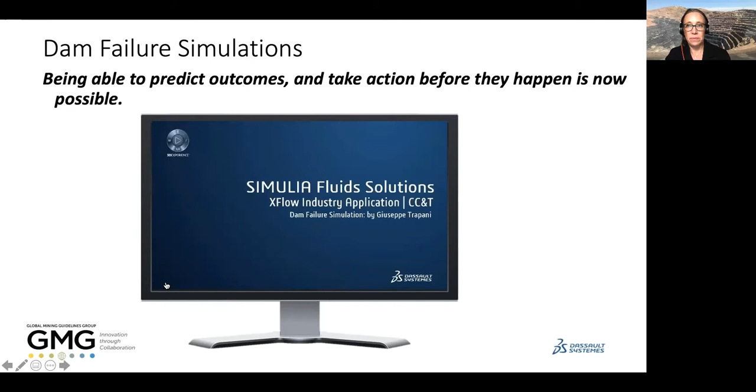So this is just the terrain that the dam is going to be built on. We have a dam wall. Now we can simulate the failure itself. Here we've just removed the dam wall. And then what is the flow pattern of the tailings that is behind that dam wall?

And you can change the viscosity of the tailings, you can change its composition, but essentially you then can have a look at what impact the tailings being released has. This is a very simple model, but we could have put buildings in the way, we could put fields in the way, we could put wild habitats in the way.

This particular model shows the speed and the strength of the material as it moves down, blue being the lowest, red, etc., being the highest. And so we can then specifically model the impacts, which then allows us not only to reposition the dam, to reduce the impacts, reposition some of the things that are in the way, create diversion channels, etc.

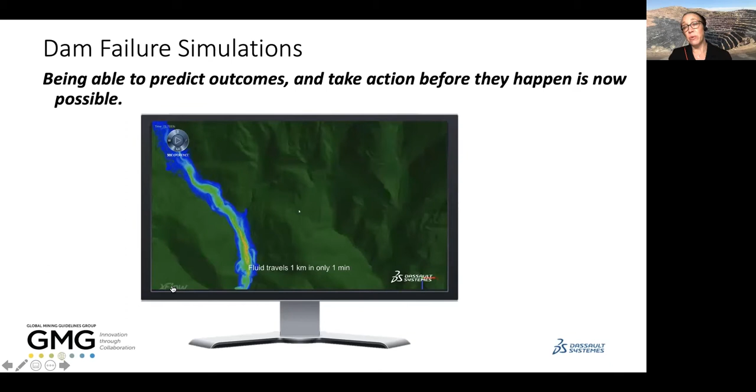And so why this is, I think, fundamentally important is it allows us to preemptively change any potential outcomes should the worst happen, and really think about, as I said, the sustainability of our operations. We can do in the virtual world before we do it in the real world, therefore reducing the risk, creating greater certainty, and so forth.

Mine closure simulations. So how do we start planning for mine closure today, even though mine closure might be 10 or 20 years away? How do we do it from the beginning of the mine so that we think from the very first piece of sod, how are we going to eventually close this operation? What is it going to look like? We can discuss those with governments, with communities.

And the great thing I think about these simulations, these movies, 4-dimensional, 3D plus time, is everybody can understand them. You don't have to be a technical expert to understand what I just showed you in terms of the tailings dam failures. You don't have to be a technical expert to understand what I'm going to show you in terms of the mine simulations. And so we can then use that for really good discussions with governments, with communities, with board members, etc.

But I think, again, part of driving operations that are fundamentally more sustainable is to use these sorts of simulations.

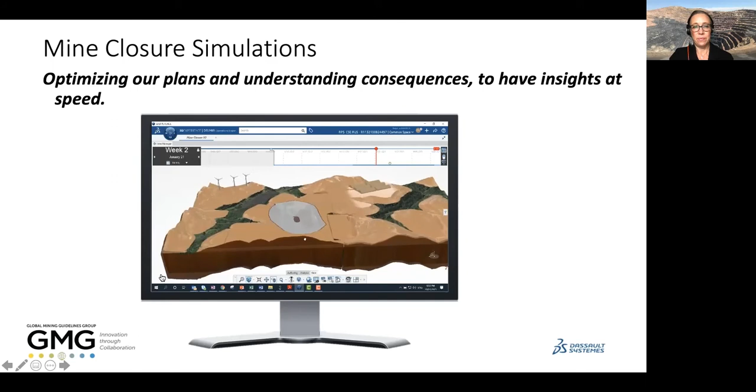So not only are those simulations helping us to think proactively, think ahead of time, but it allows us to try different things, try what if. In that particular example, you saw one of the things that was being simulated was wind turbines. But, again, we could simulate any other form of asset.

So the way we think about energy, I think, is another key to driving sustainable operations, and it's radically changing. Before we used to think about energy in terms of grid power, of large power stations often driven, in some cases, in the more remote cases, by diesel, natural gas, diesel driving a number of our mobile equipment.

But now we're thinking radically differently around solar, and a number of mining companies I know have put significant solar capability in, have put significant wind capability in. There's some more interesting technology appearing in terms of green hydrogen, which I do think is better for fixed plant than the mobile plant. But maybe I'll be corrected in time as technology changes.

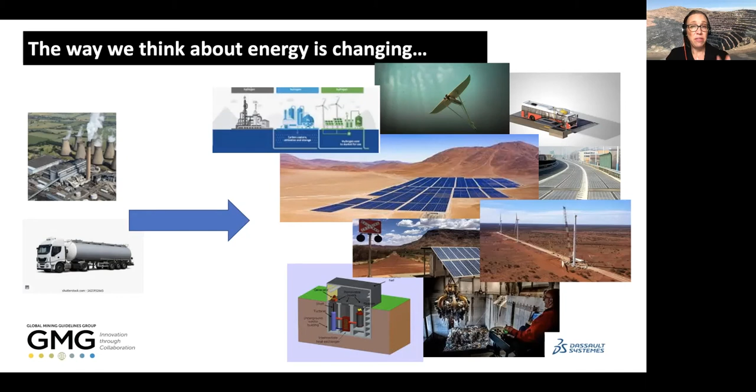We're working with some organisations that are harnessing wave power, which is this one here that you can see up in the top corner. There's a lot of research going on into small nuclear reactors, as well as biofuels, and not only biofuels, but also using waste to generate power. So, we're getting radical changes in energy thinking, and again, we're seeing that translate into mining organisations.

But what's helping really then us think about how does the electric mine change our ore bodies, because the economics change. How does it change our mine designs, which it of course does. If you electrify and automate, and you've got an open cut mine, for example, you can most probably take your ramps down from 2.5 times the truck width to 2.1, and possibly even lower than that.

The turning circles potentially change in your underground operation as you replace diesel equipment with battery electric equipment. And then I think more importantly, you rethink and potentially change with conveyance technologies. And I think that's where we then get a much more significant change. But again, all of these can be looked at under simulation.

You can look at your underground, in this case, mining operations. You can go, well, what does change if I put in different styles of equipment? If I start electrifying my mine, what changes in terms of my need for ventilation, what changes in terms of my need for power reticulation, how do I set up my battery technologies, how do I set up my charging, if that's what I need, where would I put my conveyors and my conveyance technologies, where would I run my fleets.

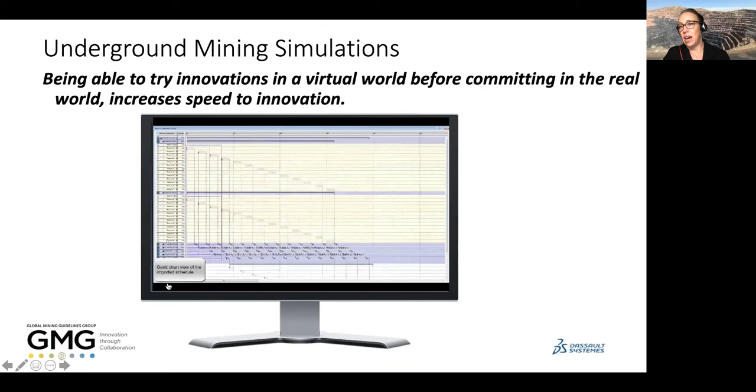All of that can be simulated. So here's an example of a very simple simulation to look at different equipment styles. So you can see initially setting up the mine infrastructure, the mine design. You'll see them putting in different types of equipment, watching how that equipment then operates. How does it change particular turning circles, turning capacities, loading rates. This is just running pieces of equipment through that.

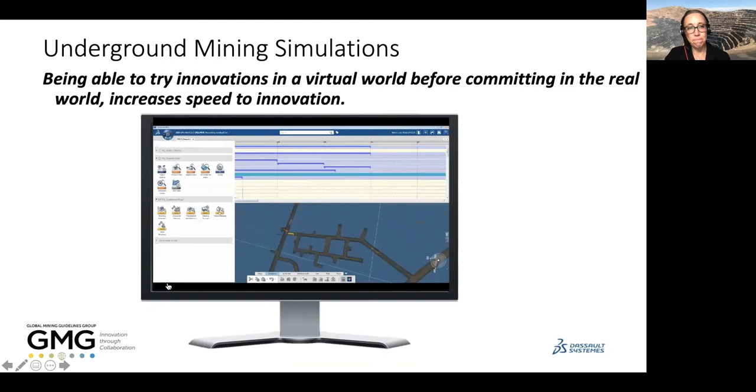So it allows us to really model in the virtual world what we want to try out in the real world. And again, de-risking it, because we can see some of the results of those simulations very, very rapidly. We can try all sorts of different things.

So the more that we can model, design and simulate the real world in the virtual world, the more that we can enable people to experiment and experience those outcomes, the faster we will innovate. And it's really because we will de-risk. We'll de-risk both the experience, we'll de-risk some of the optionality. We can try different things faster. It's much easier to change it in a model than it is in real life.

So often what I get asked is, but how real are these simulations? So we build the simulations up from base science and using science from base layers. And I think that is important, that we think about how do we actually much more specifically model what's going to happen. And often that takes some time to get the models right, and to get these simulations right so that they are based on science and science principles.

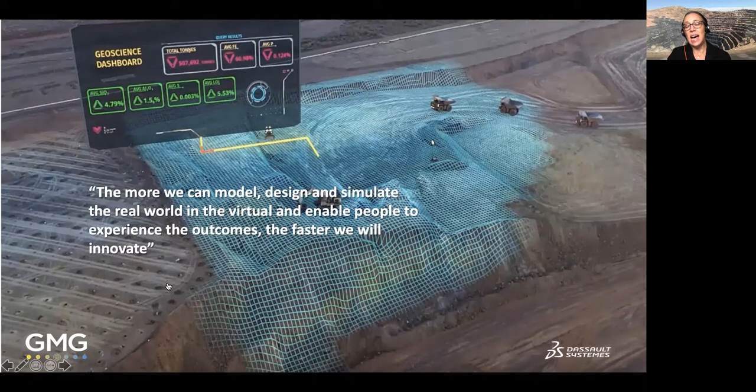But in other industries, in the car manufacturing industry, for example, they don't need to put crash test dummies in a car and smash it against the walls anymore. There are simulations to do that, and how they model the materials, how they model changes in materials, how they model the car, the impact to the human body is so precise that they can run those simulations virtually rather than having to do those in the real world anymore.

So what we need to start creating, though, is not just these virtual experiences, these simulations in the virtual world. We need to then start connecting them to real world data to improve those simulations, make them more accurate, as well as change those simulations and predictions as we get more and more data. And this is especially so until we've really solved that problem that we spoke about earlier in terms of geological understanding and knowing our ore bodies down to the last gram, to the last meter, because often things change, as we all know, within our ore body, and then that changes our plans. We also change our plans due to performance requirements of our equipment, etc.

So you'll see here in this particular example where we've tried to link some of the virtual experience, some of the simulations with the real world and some of the actuals and the real-time data that has been obtained, to then bring the simulation and the real world together to improve both.